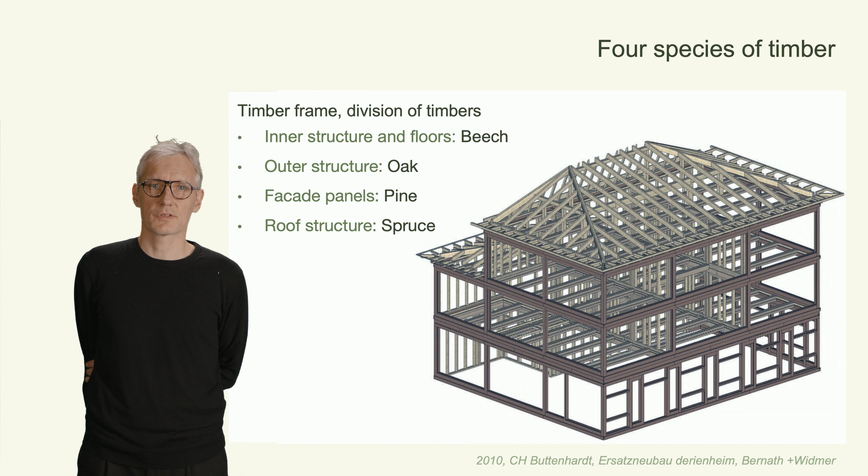The inner timber frame and floor structure was constructed in beech. The outer timber frame structure in oak. The other filling in the facades were in pine, and the spruce was used to construct the pitched roof. But there is the kicker. The squared beams underwent core drilling to prevent excessive cracking and twisting while they are drying.

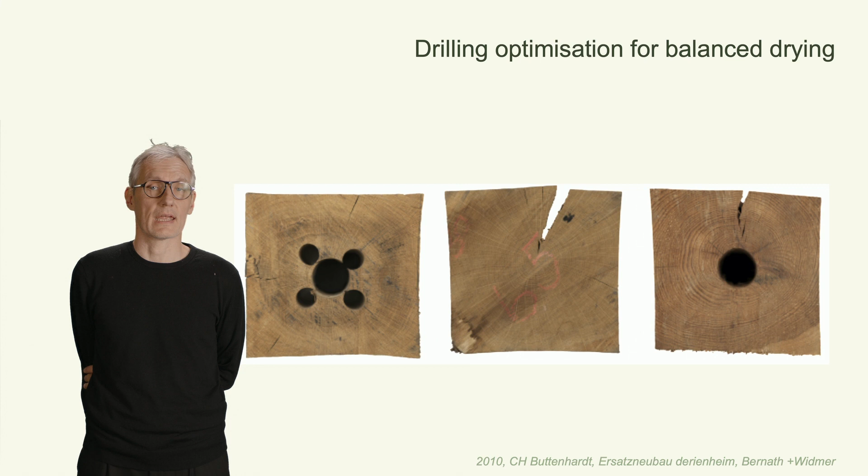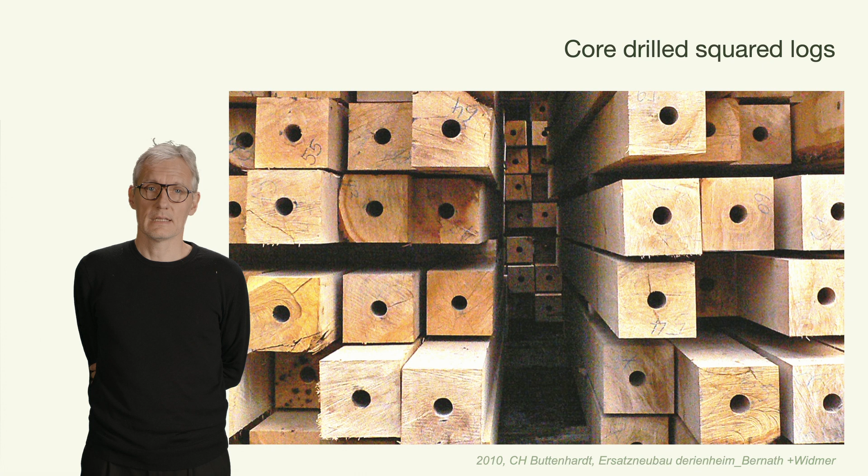This was a crucial engineering solution to make the deciduous logs suitable for construction, which is a true innovation in timber frame construction. The engineers used a special drilling machine that could accommodate a 2.60 m long drill bit. This set the maximum beam length at 5.20 m. Steel tie rods were then inserted into these core-drilled oak beams to enable larger column frame spans as well as provide lateral bracing.

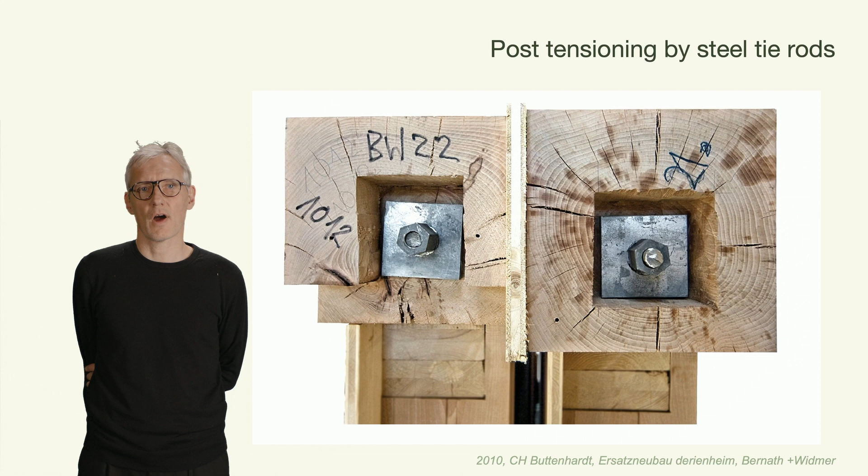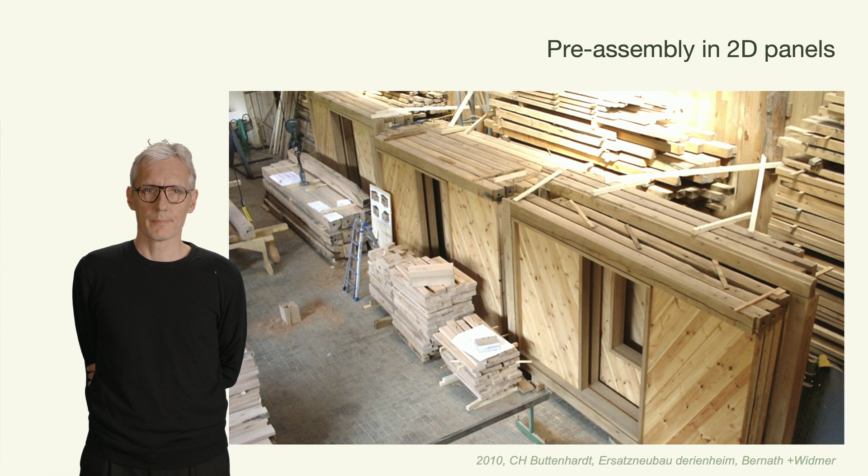In the controlled environment of the wood workshop, the timber frame alongside the facade panels were pre-assembled into 2D elements. These elements were then assembled on site to form the outer structural envelope of the building. Timber prefabrication in 2D elements often encompasses the finishing of the facades, which then require no further work to be done on site. In this case, only the window frames were placed later.

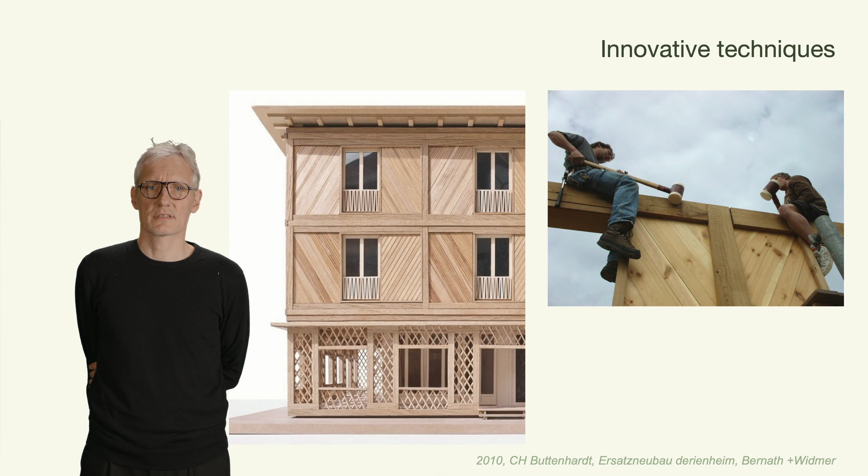These innovative techniques were employed given the challenges of sourcing and working with the locally harvested wood, combined with the specific structural requirements of the building and the woodworking skills of the carpenters. The pine boards are cut and sanded. The oak beams are left raw. This renders the facade in a beautiful play of texture and colors. When illuminated by the evening sun, it feels softened and washed in a golden hue.

Many timber structures feature a concrete base that comprises the first few floors, transitioning to timber construction for the upper levels. One of the primary reasons for this approach is structural integrity. The concrete base offers strong foundations and can bear higher loads, setting a stable stage for the lighter timber structures above. It also keeps the timber structure at a safe distance from the ground conditions.

Additionally, the concrete base contributes to fire safety. As a non-combustible material, concrete adds a level of fire resistance to the base. Concrete bases are often more cost-effective for parking garages and commercial spaces. Let's talk about how post and beam structures handle lateral loads. Wind, for example, is a powerful force that can significantly impact a building. In post and beam systems, the horizontal beams resist these lateral forces.

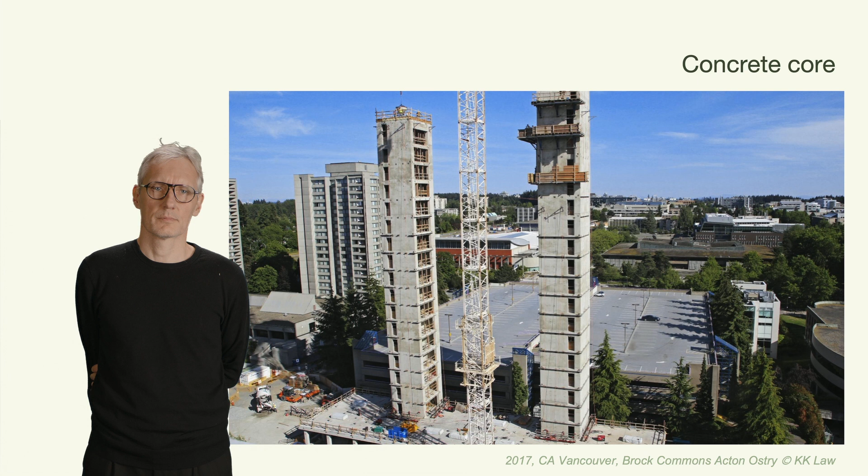CLT cores are being explored as an alternative due to their lighter weight and quicker installation process. While still strong, they don't offer the same stiffness as concrete cores, which can be a factor in taller structures. And despite common misconceptions, properly treated CLT can perform well in fire conditions. The outer layer chars, protecting the core and maintaining structural integrity for quite a long period.

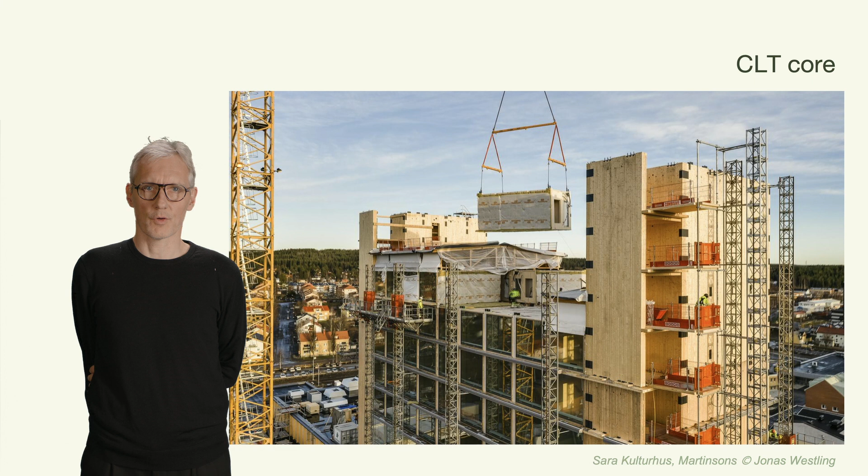In general, the lightweight nature of timber is considered an advantage in construction, particularly for topping up existing buildings or constructing on sites with poor soil conditions. However, being too lightweight can pose challenges in certain scenarios.

Now, diving deeper into Brock Commons, it's important to note that this building doesn't strictly adhere to just one category of timber construction system. In most cases, you will find projects sticking to either a post and beam system or a panel and solid timber system. But Brock Commons synthesizes elements of both.

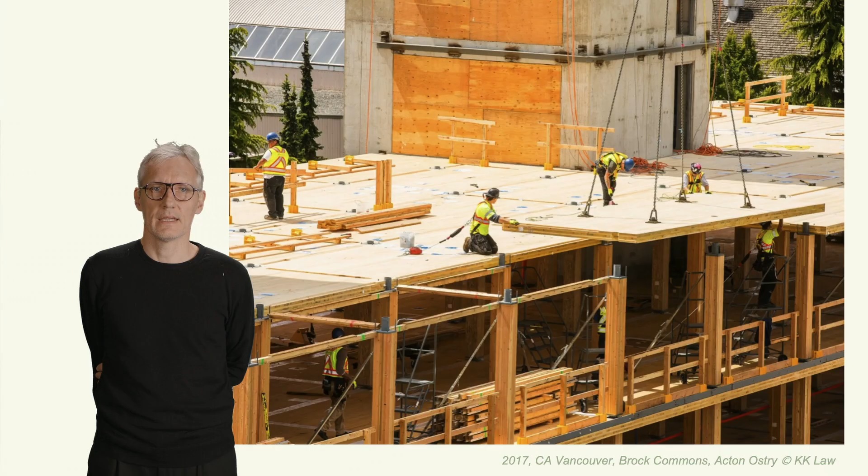In high-rise timber buildings, distributing the load evenly becomes crucial. This often involves transferring loads from timber to other materials like steel or concrete at certain points, making it a true hybrid system. Here is why this is revolutionary.

In traditional post and beam construction, the framework is responsible for bearing the vertical loads, while the walls are generally not load-bearing. Brock Commons takes the vertical load-bearing efficiency of the post and beam system using glue-laminated timber for the posts and combines it with the rigidity and lateral stability offered by the concrete cores that are tied together by the solid cross-laminated timber floor panels.

This synergy of systems allows for more freedom in design and layout, while also meeting the structural and safety requirements for an 18-story building. This diagram shows the foundation of Brock Commons, the concrete first floors and cores. This base provides stability and houses essential services like elevators and stairwells.

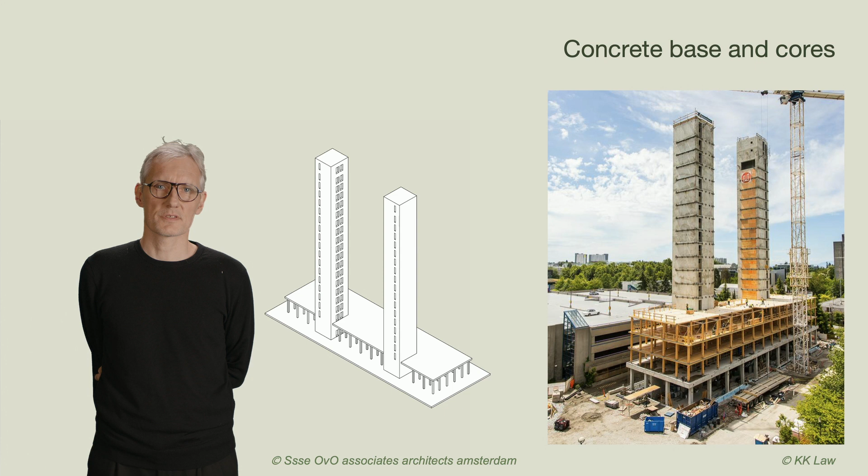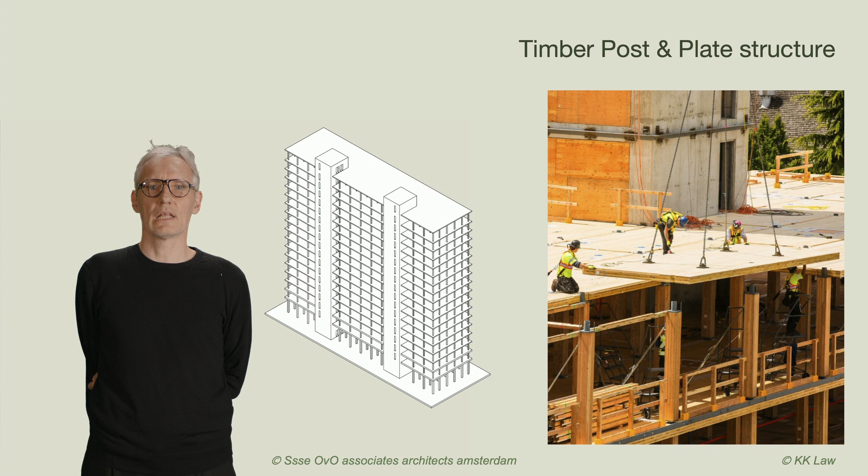Adding to the concrete base, the timber posts combined with the solid timber floor are assembled. This is where the hybrid nature of the building starts to reveal itself. Only 2 floors down, the prefabricated and completely finished facade panels are already mounted between the floor edges. They not only close the building, but also enhance its thermal performance, rounding out the holistic design approach of this hybrid system.

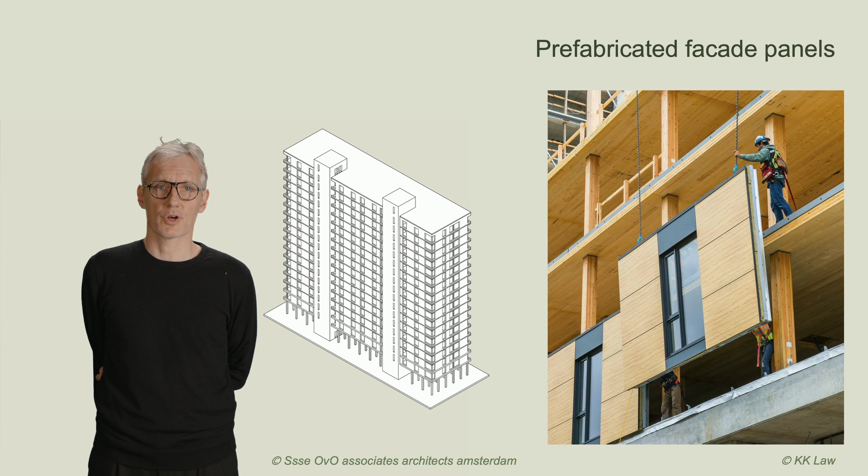We now move on to composite timber concrete floor systems. For instance, composite timber concrete slabs originated in the 1920s. Compared to solely timber structures, these composite slabs offered improved structural performance, fire safety, soundproofing, and they dampen vibrations. They are ideal for medium to long spans.

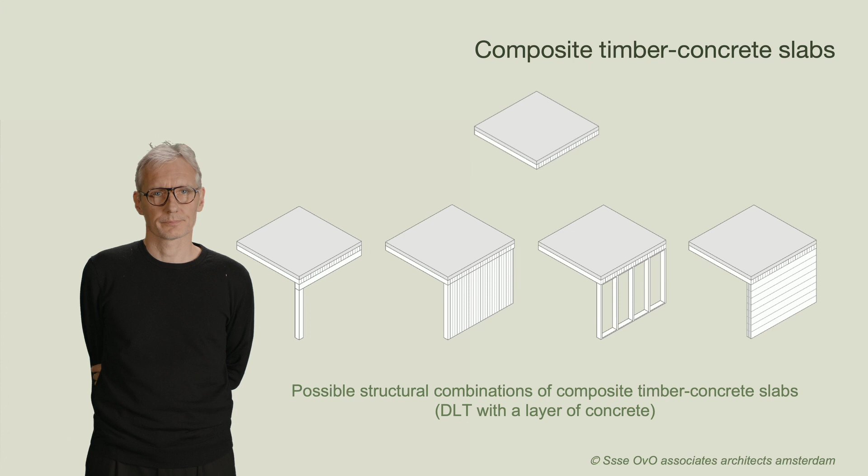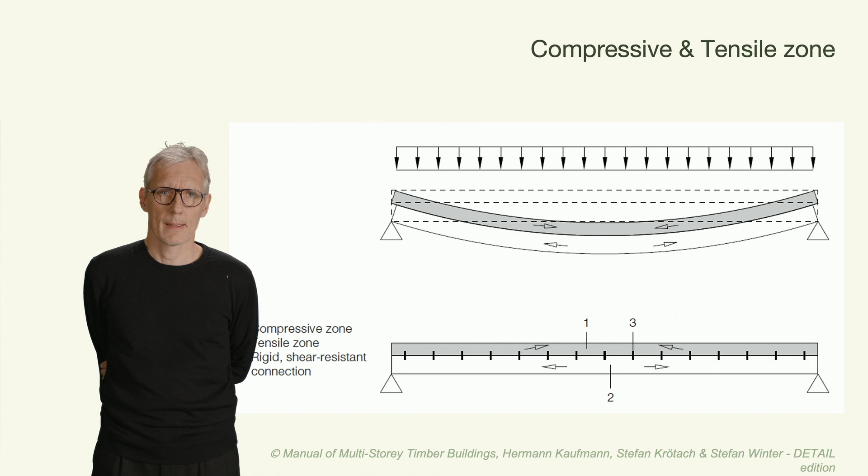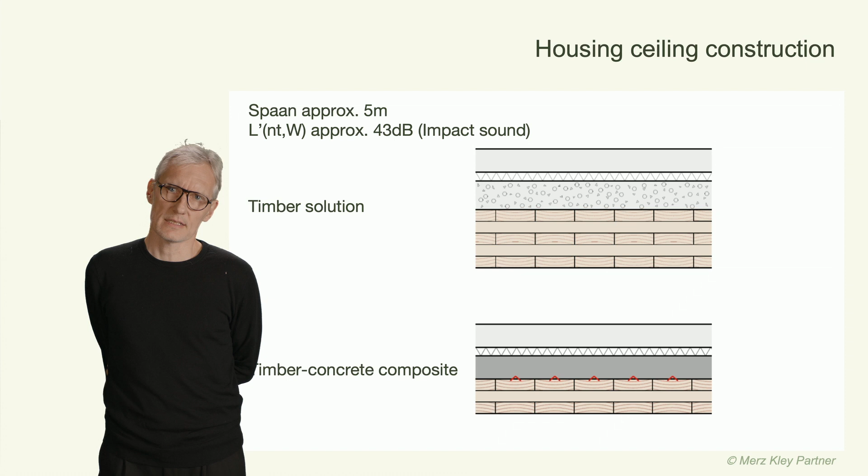For the composite to work, the concrete acts as the compressive zone while timber serves as the tensile zone. A rigid, shear-resistant connection is essential. These slabs work best as single span beams. Now let's compare the weight and thickness for two different ceiling solutions with a 5 meter span and 43 decibel of impact sound insulation.

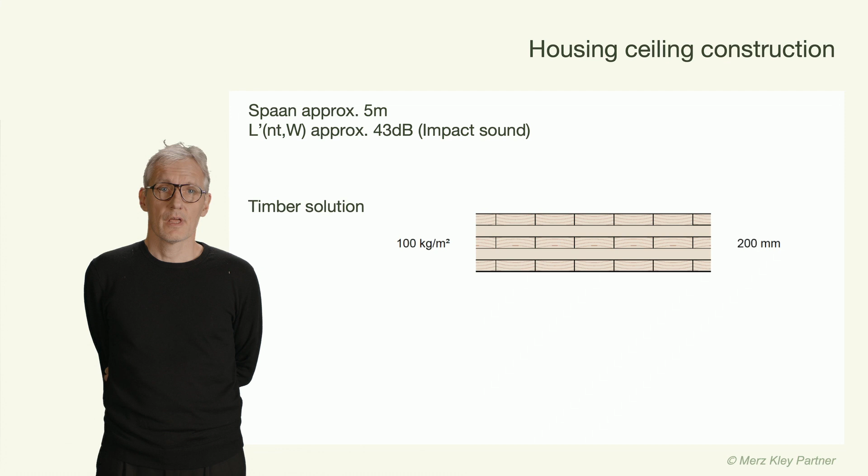First, we have the timber solution. It includes a CLT slab, filler for sound insulation, and a finishing layer with a total weight and thickness of 410 millimeters and 400 kilogram per square meter.

Next, the timber concrete composite solution. This one is composed of a thinner CLT slab. Combined with the concrete slab, it gets the necessary acoustic qualities. And again, the finishing. If we compare the two, we can see how the timber concrete composite is 100 millimeters thinner while weighing the same as the timber solution.

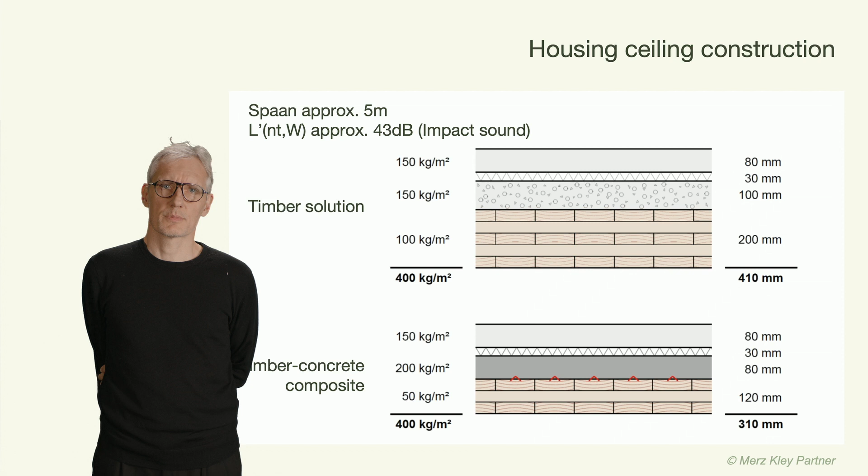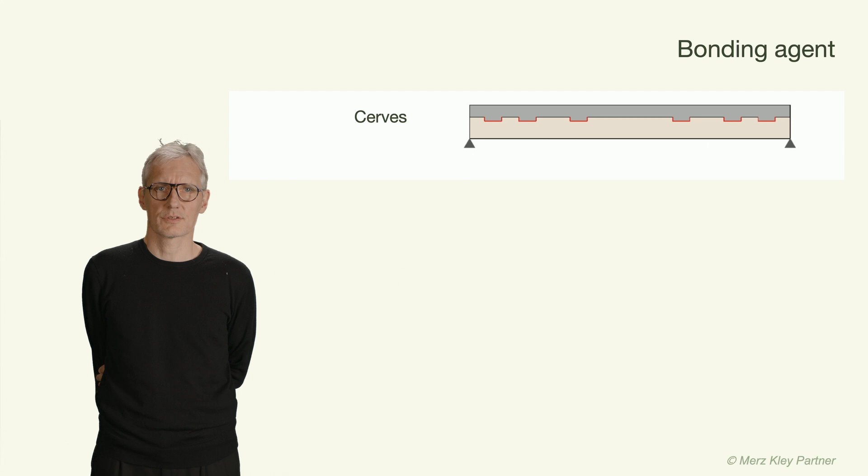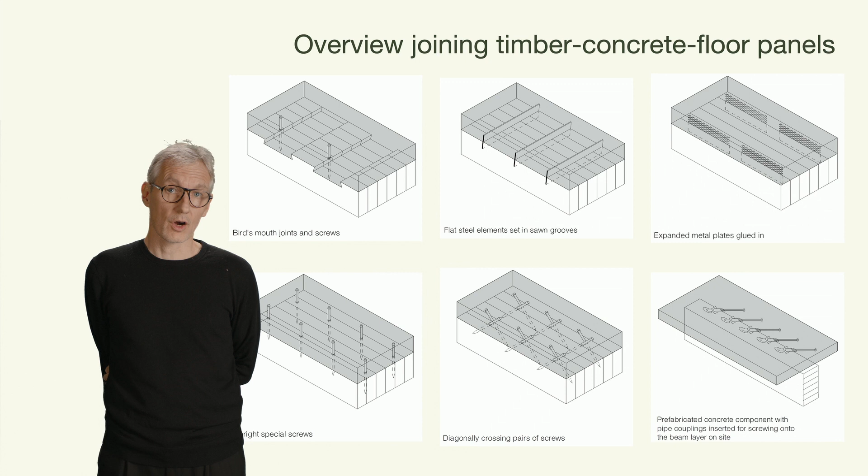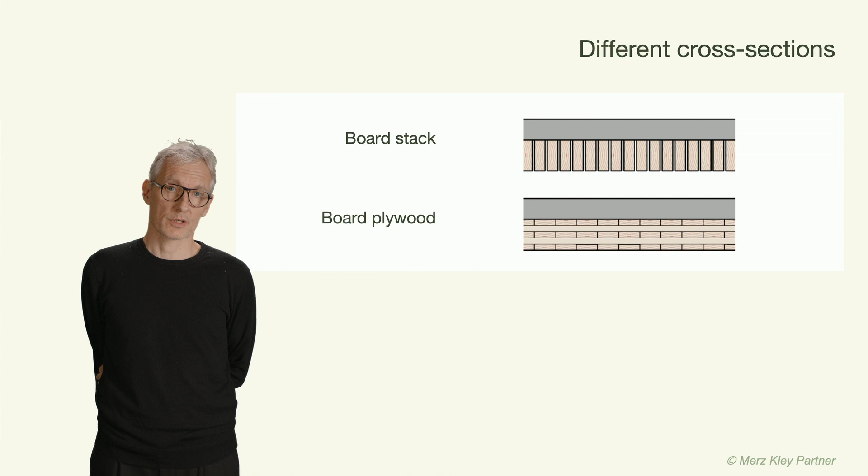Moving on, let's talk about bonding agents. These agents serve to connect timber and concrete together. We commonly use cerves, screws, or glued-in sheets. The structural integrity of these panels relies on these specialized joining techniques. There are also different types of cross sections for these composite slabs. Options range from a board stack, board plywood, glulam laying to a beam.

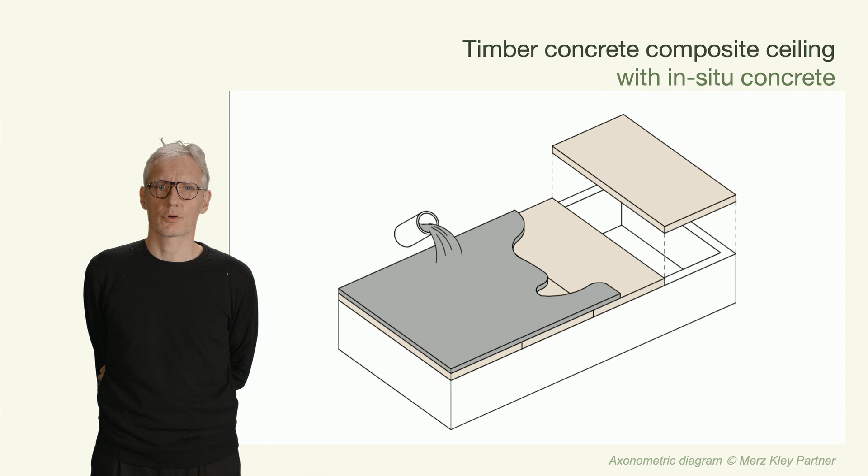Here is an axonometric diagram of a timber concrete composite ceiling with in situ concrete. The first way to manufacture this floor system is in situ concrete on top of a prefabricated timber element. Take note of the construction process showing how concrete is poured in situ. Our next example showcases a plate beam ceiling. The construction involves both prefabrication of wood parts and in situ concrete work.

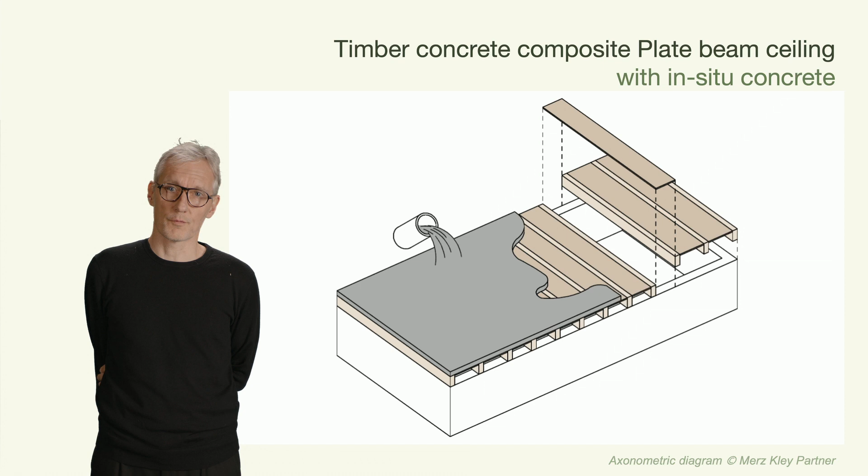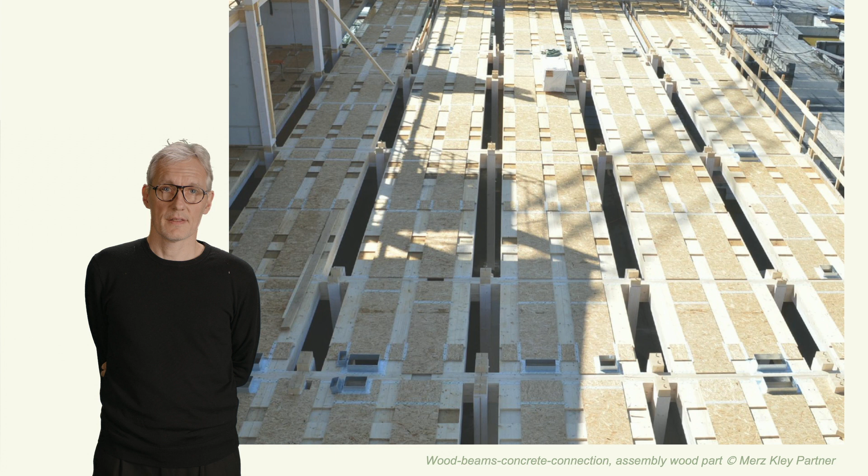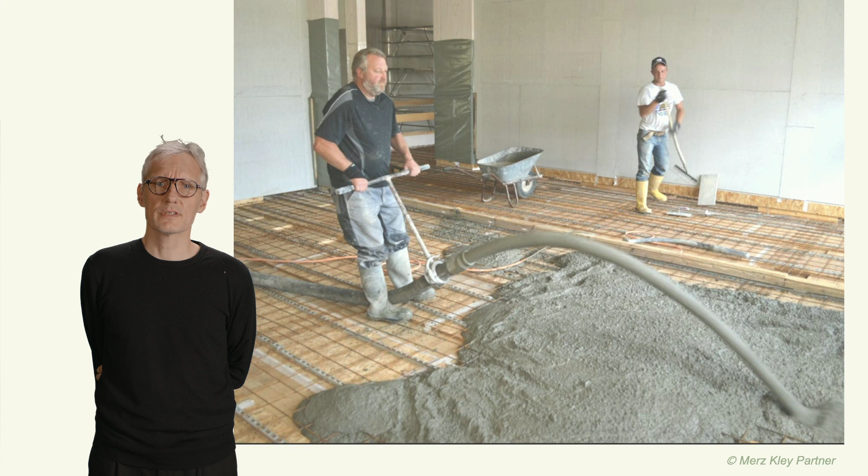Here you see a linear floor element in the factory. The cerves are visible in the bottom part. This element and many more will be transported to the construction site to be assembled on the support structure. Then the floor is ready for in situ casting to become a composite timber concrete floor. Openings for vertical penetrations for building services are included. A layer of concrete is poured on site with reinforcement to prevent cracking.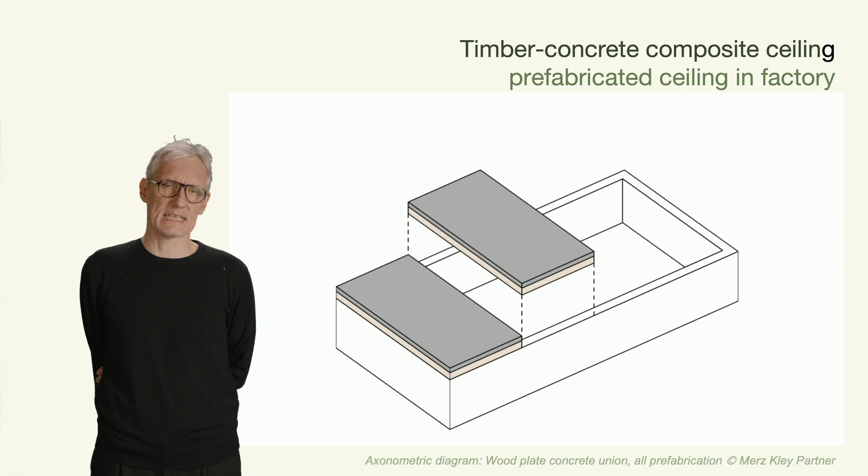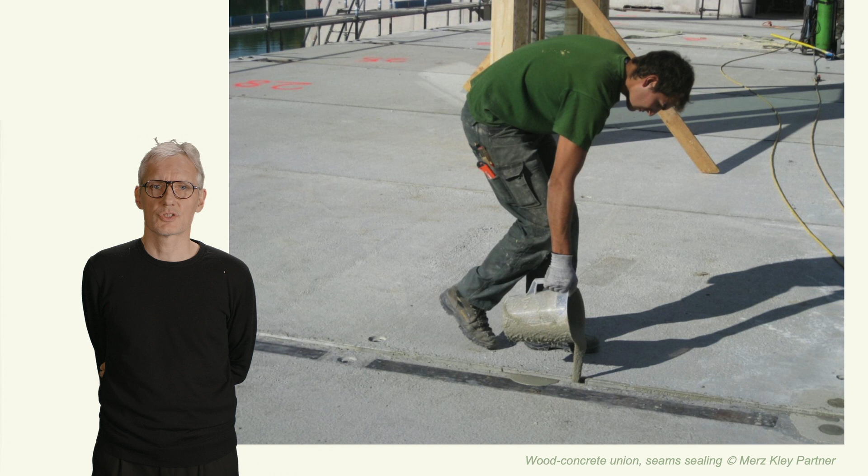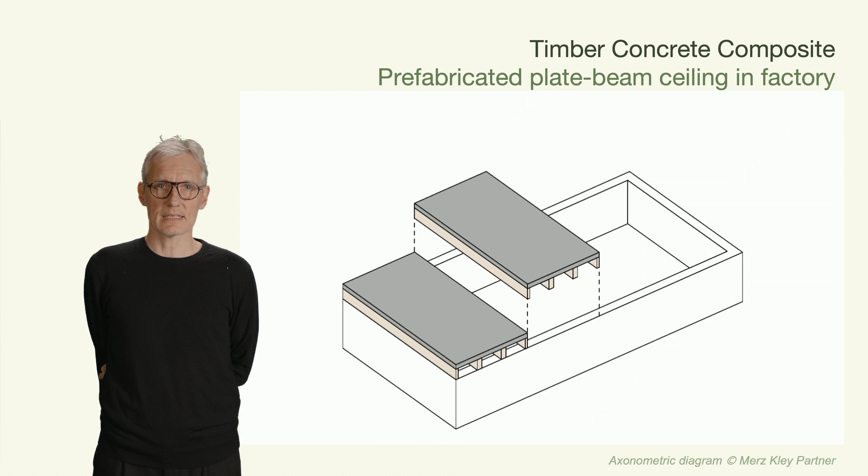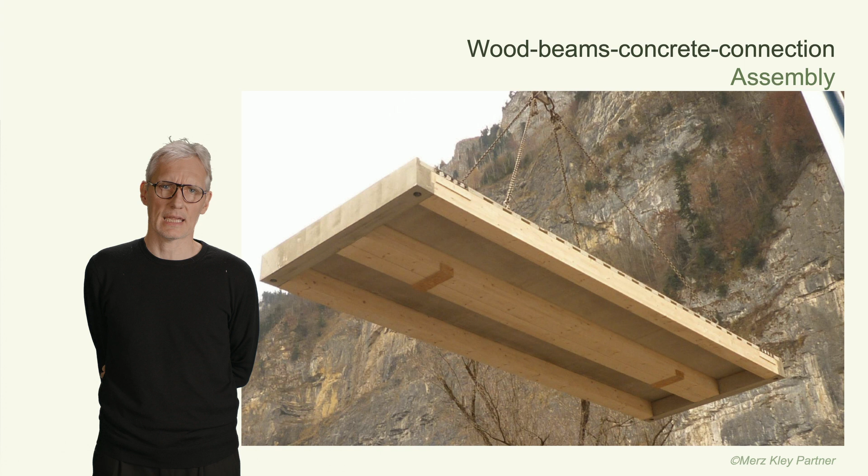Now let's look at a prefabricated timber concrete composite ceiling. The prefabricated elements are placed using a crane, and the placed elements only require the joints to be poured on site for a largely dry construction process, which keeps the building site very clean. This is another variant of a prefabricated ceiling using plate and beam system instead of mass timber. Here you can witness a large prefabricated element of this type being craned into position.

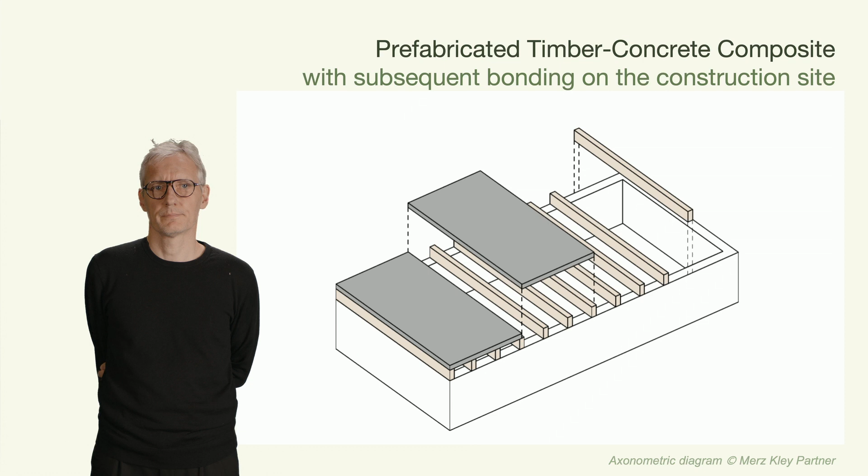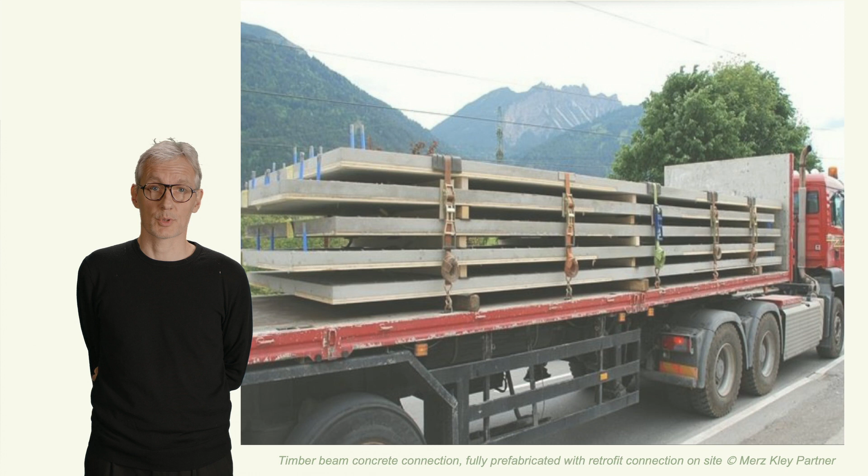And lastly, we have a unique approach where prefabricated timber concrete composite slabs are bonded with timber beams through screws on the construction site. First, let's look at the timber beam structure. This is the foundation on which the prefabricated timber concrete composite slabs will be attached. Here we see the transportation process. The prefabricated timber concrete composite slabs are being moved on a truck to the construction site.

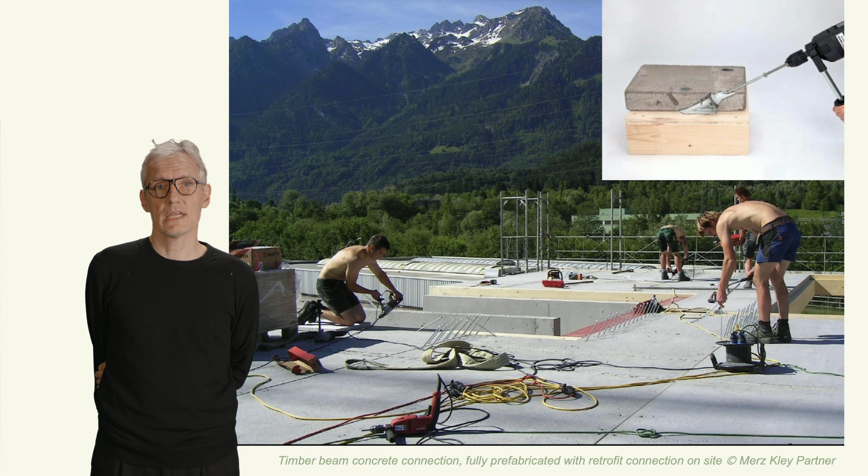And now we reached the assembly phase. This image captures construction workers screwing the beam structure and timber concrete composite slabs together. This is the moment where both elements come together to create a strong, integrated system. The combination of timber with other materials allows for more versatile design options, enabling architects to optimize each material's properties for specific structural or aesthetic needs.